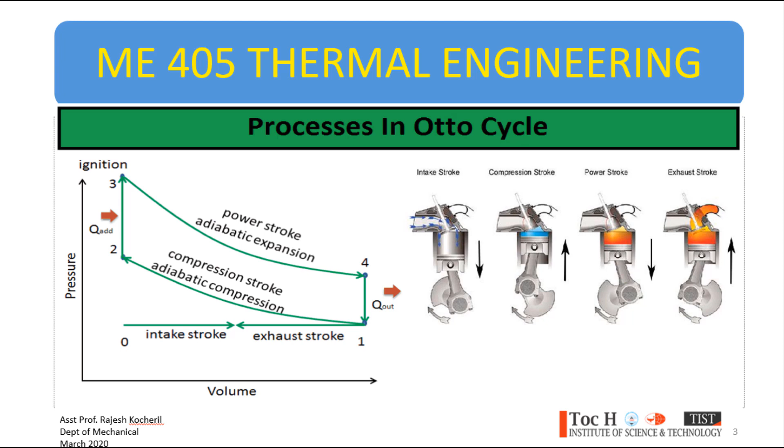From point 4 to point 1, heat rejection takes place, and 1 to 0, or you can say 1 to 6, is the exhaust stroke. This is how the process takes place in an Otto cycle.

Now let us see the PV diagram and TS diagram, pressure volume diagram and temperature entropy diagram of the Otto cycle. At point 1, the cylinder is fully charged with air fuel mixture, and 1 to 2 is the compression.

So the volume is being reduced from point 1 to point 2. The swept volume, Vs, is the volume swept by the piston from one dead center to the other dead center, that is either from TDC to BDC or from BDC to TDC.

In this case, the piston moves from BDC to TDC, causing a reduction in volume, and this volume from 1 to 2 is the swept volume Vs. The volume above the piston when it is at TDC is the clearance volume, which we call V2 or VC.

Then 2 to 3 is the heat addition process, QA, 3 to 4 is the reversible adiabatic or isentropic expansion, and 4 to 1 is heat rejection.

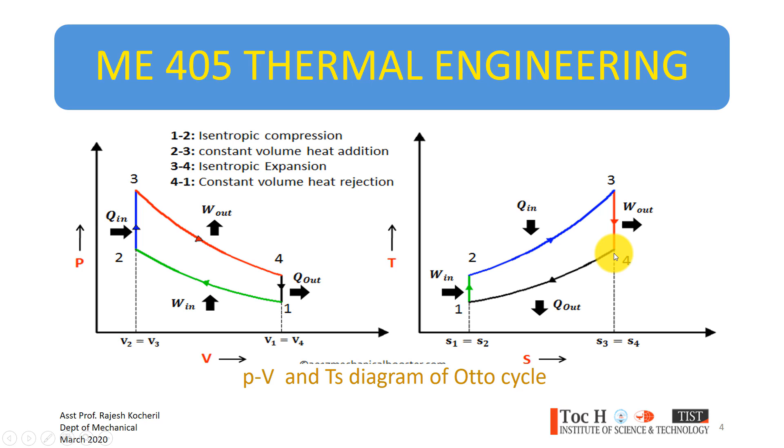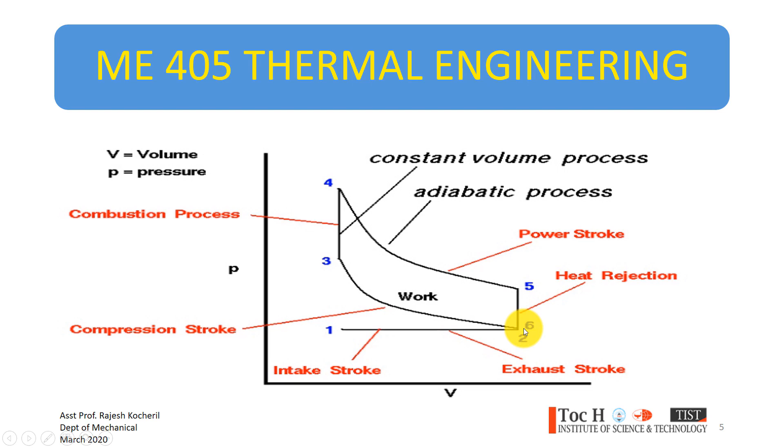For easy understanding, the same process: 1 to 2 is inlet, 2 to 3 is compression stroke, 3 to 4 is combustion, 4 to 5 is expansion or power, and 5 to 6 is heat rejection. In process 1, the inlet valve is open and air from the atmosphere is being taken in.

As the piston moves down this much volume—if this is the bottom dead center and this is the top dead center—the volume swept by the piston from TDC to BDC is the swept volume.

When the piston is at TDC, the volume above the piston is called the clearance volume, VC, or you can call it V2.

After this, as the piston moves up, both inlet and exhaust valves are closed, so the charge is compressed. As the piston exerts work on this fluid, the temperature and pressure increase. When it is about to reach TDC, the spark is initiated and the charge inside ignites in a propagatory way, similar to waves.

Subsequently the power generated by the explosion acts on the piston, and the piston moves down. Through the connecting rod, the piston is connected to the crankshaft, and at the end of the crankshaft, through different power transmission arrangements, it is either transmitted to the wheels, to the diesel alternator, or to the propeller in the case of a ship or motorboat.

Thereafter the exhaust valve opens, and as the piston moves up, the hot gas remaining inside the cylinder is pushed out through the exhaust valve and silencer to the atmosphere, while the inlet valve also opens. This Otto cycle is an idealized thermodynamic cycle which tells you exactly how a spark ignition engine works.

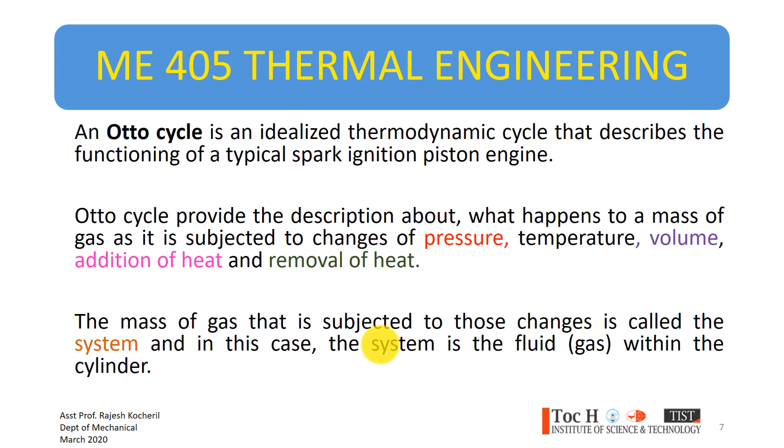The Otto cycle is constructed such that if you measure the volume from 1 to 2 and from 3 to 4, it is the same. So the volume swept from 1 to 2 and from 3 to 4 is the same. The construction of this PV diagram is such that the left and right side of the loop is a pair of parallel constant volume processes, that is, process 2 to 3 and process 4 to 1.

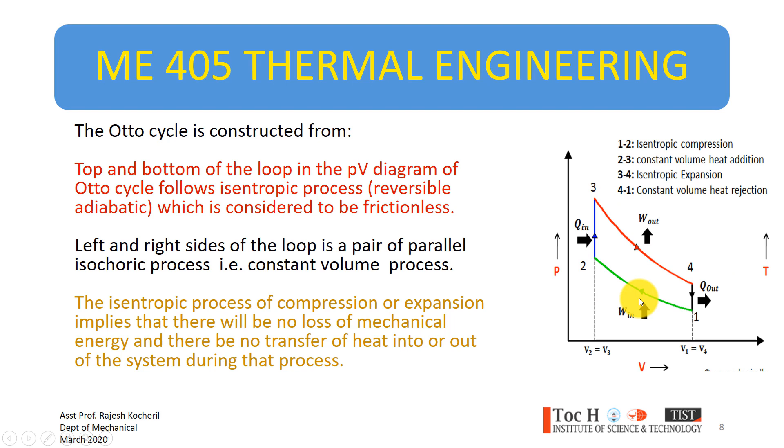Heat addition takes place at constant volume from 2 to 3, whereas 4 to 1 is heat rejection at constant volume. So V1, the volume at 1, and the volume at 4 are the same, so V1 equals V4 and V2 equals V3. These terminologies are required when we do numericals on the Otto cycle.

Process 1 to 2 is isentropic, reversible adiabatic compression. Process 2 to 3 is constant volume heat addition. Process 3 to 4 is reversible adiabatic or isentropic expansion, the power stroke. Process 4 to 1 is heat rejection at constant volume, and 1 to 0 is the exhaust stroke.

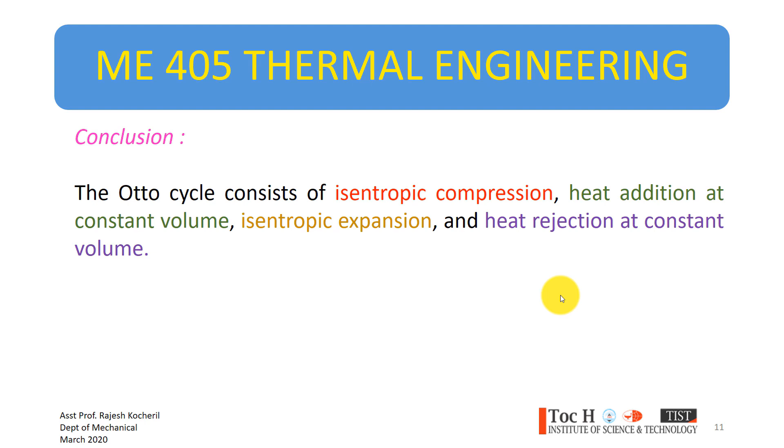To conclude, the Otto cycle consists of isentropic compression, heat addition at constant volume, isentropic expansion, and heat rejection at constant volume.

Now let us derive the efficiency of the Otto cycle. We generally denote efficiency as eta, and efficiency in any process is the work done divided by the heat supplied. In the case of an IC engine, internal combustion engine, the efficiency is the work done divided by the total heat supplied to the system.

Let us consider 1 kilogram of substance. The heat supplied can be at constant volume or constant pressure. If the heat is supplied at constant volume, we call it CV, and if supplied at constant pressure, we call it CP. Here the heat addition and heat rejection take place at constant volume. Therefore, the heat supplied is CV into T3 minus T2.

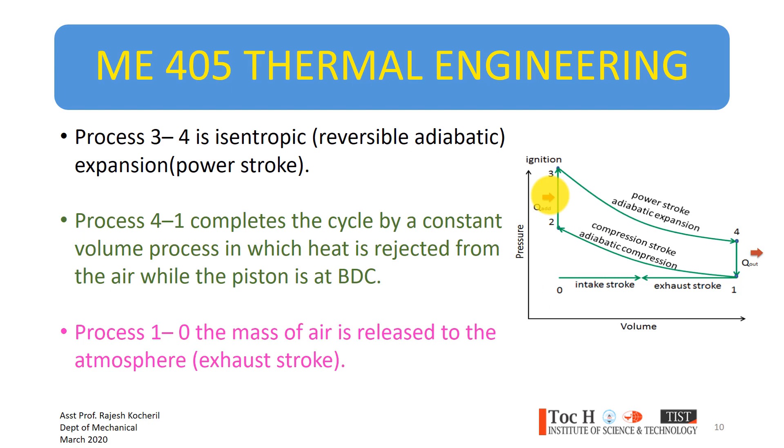T3 is where the heat addition is cut off and T2 is the point where heat addition commences. Therefore, the heat supplied to the system at constant volume is CV into T3 minus T2. Heat rejection occurs in the process from 4 to 1.

The heat rejection at constant volume is CV into T4 minus T1. Now, work done is heat supplied minus heat rejected. In an IC engine, heat supplied is CV into T3 minus T2 and heat rejected is CV into T4 minus T1. Therefore, work done in an Otto cycle is CV into T3 minus T2 minus CV into T4 minus T1.

The efficiency of the cycle is work done by heat supplied, and work done is heat supplied minus heat rejected. Therefore, efficiency eta is heat supplied minus heat rejected by heat supplied. Heat supplied is CV into T3 minus T2 and heat rejected is CV into T4 minus T1. This gives the efficiency of the cycle if you know the temperature at all salient points.

The salient points are T1, T2, T3 and T4, and the value of CV is known and fixed. The value of CV is 0.718 and the value of CP is 1.01, and CP by CV is gamma, which is 1.01 divided by 0.718, giving you 1.4.

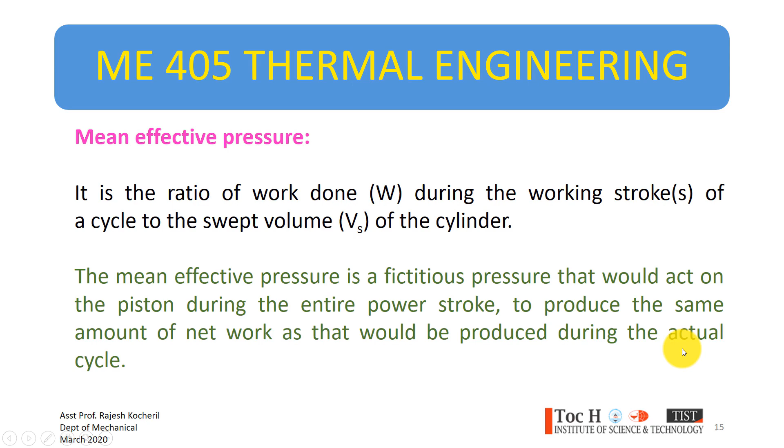Now in concluding this session, I wish to tell you that the efficiency totally depends upon the compression ratio. As you are aware, the efficiency will increase if there is an increase in the compression ratio. So the efficiency of Otto cycle totally depends upon compression ratio. The only factor, or the prime factor, that affects the efficiency of Otto cycle is its compression ratio.

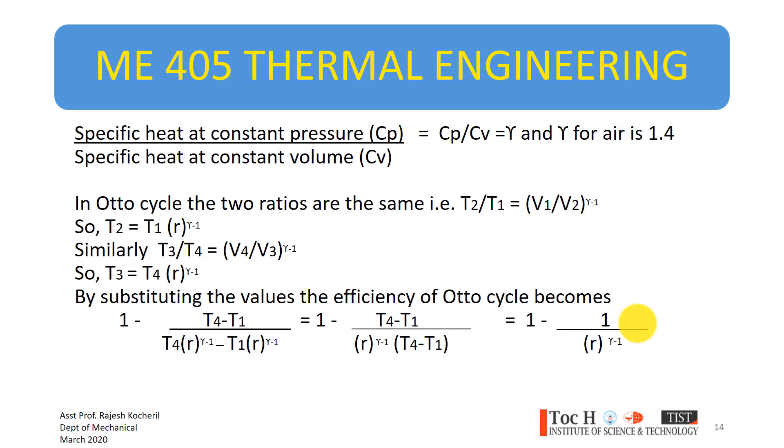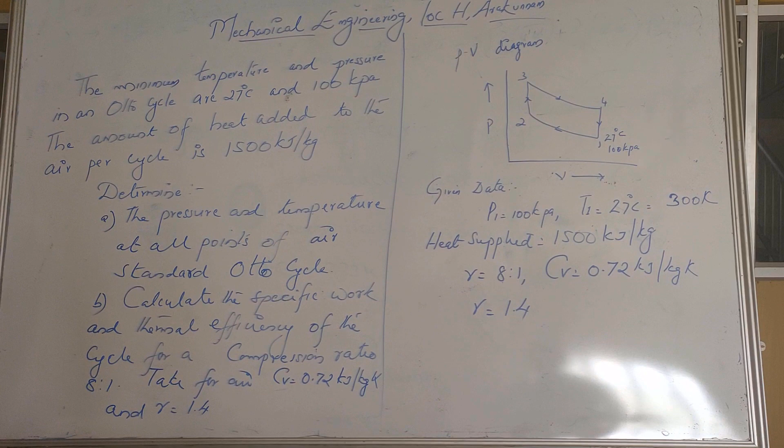Now we are going to do a numerical on Otto cycle. As you are aware, Otto cycle is a constant volume process, so heat addition and heat rejection takes place at constant volume. Keep in mind that heat addition and heat rejection takes place at constant volume, and the volume at point 2 to 3 and 4 to 1 are same. So V1 will be equal to V4, V2 will be equal to V3.

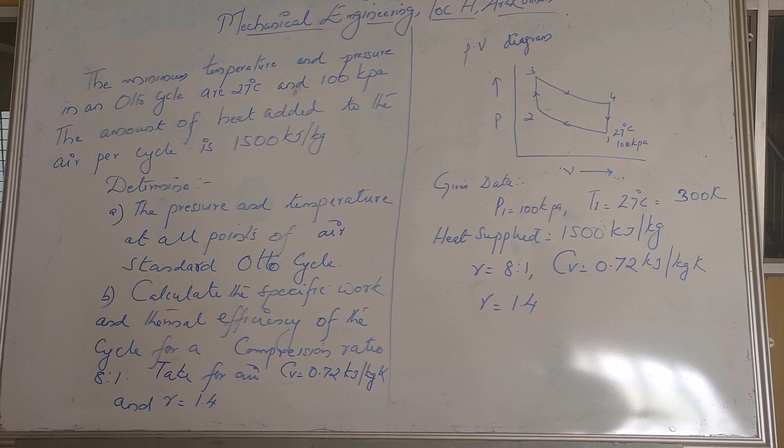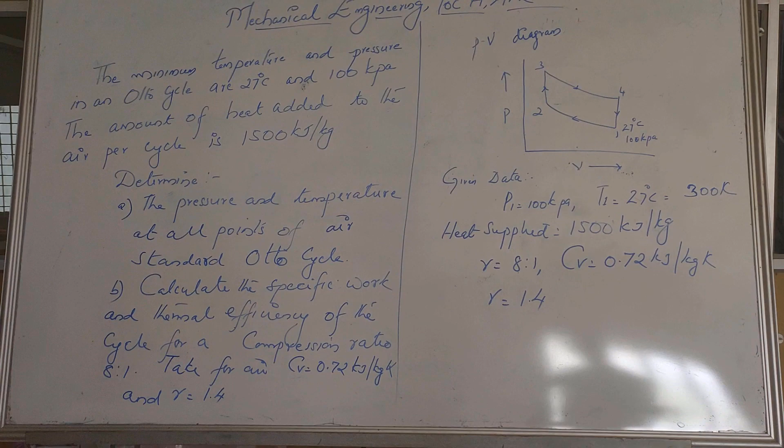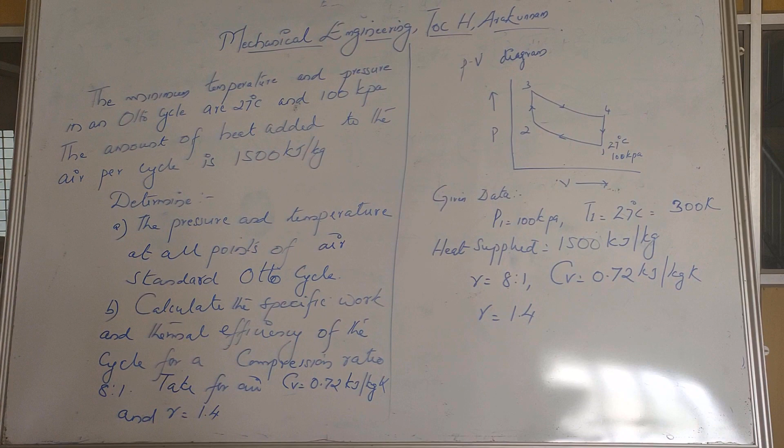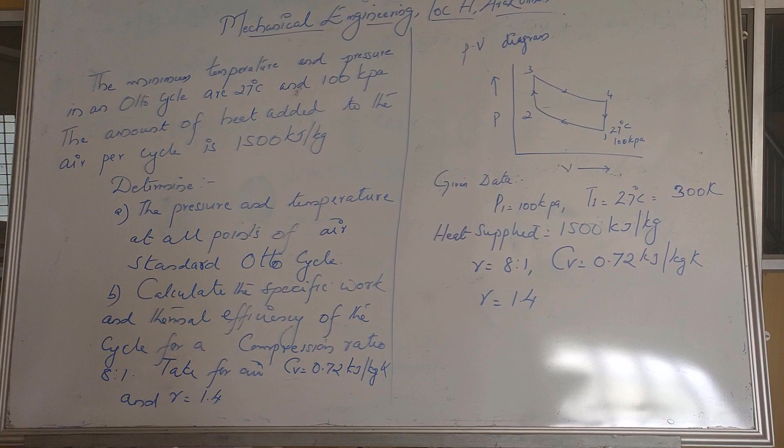Now keeping this in mind, we are going to do a numerical. The question is: the minimum temperature and pressure in an Otto cycle are 27 degrees Celsius and 100 kilopascal. The amount of heat added to the air per cycle is 1500 kilojoules per kilogram. Determine the pressure and temperature at all points of the air standard Otto cycle. B: Calculate the specific work and thermal efficiency of the cycle for a compression ratio of 8:1.

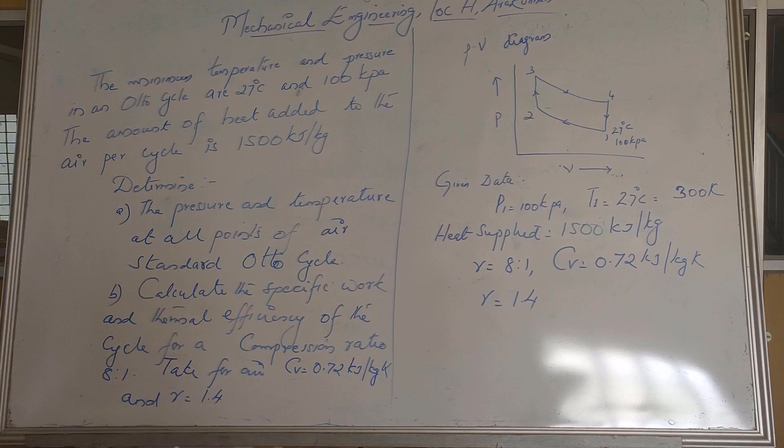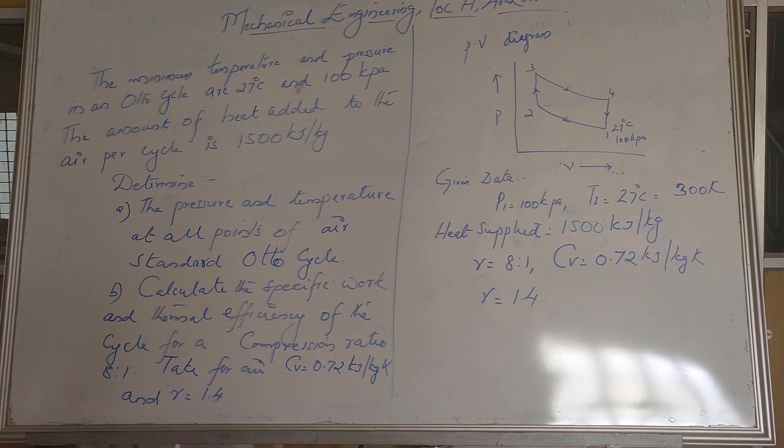Now before you get into solving this numerical, you should keep in mind how a PV diagram of Otto cycle looks like. So you should draw the PV diagram of Otto cycle before you actually proceed, and mark whatever values are given in the PV diagram itself, so that at the end you are aware that all questions are answered appropriately.

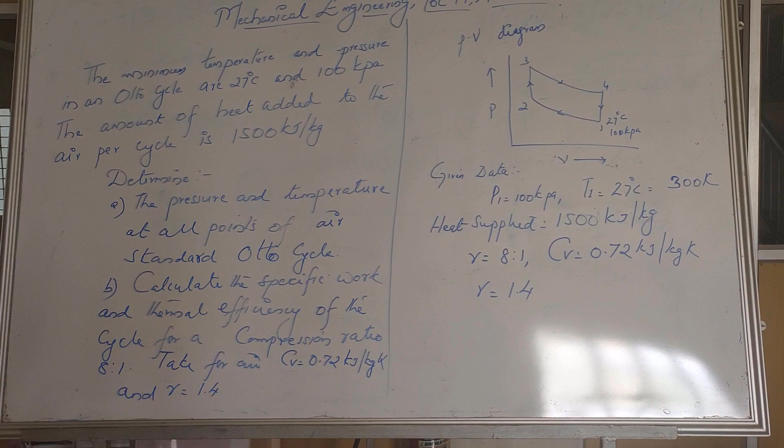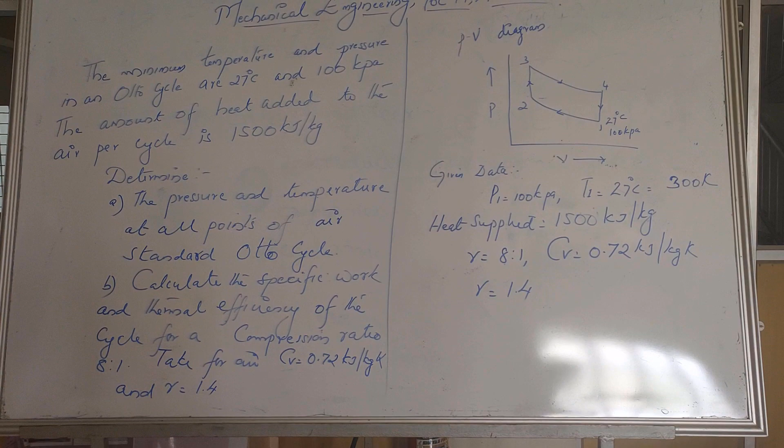Now the PV diagram I have drawn on the board has salient points 1, 2, 3 and 4. That means you need to find out the temperature at points 1, 2, 3, 4 and pressure at points 1, 2, 3 and 4.

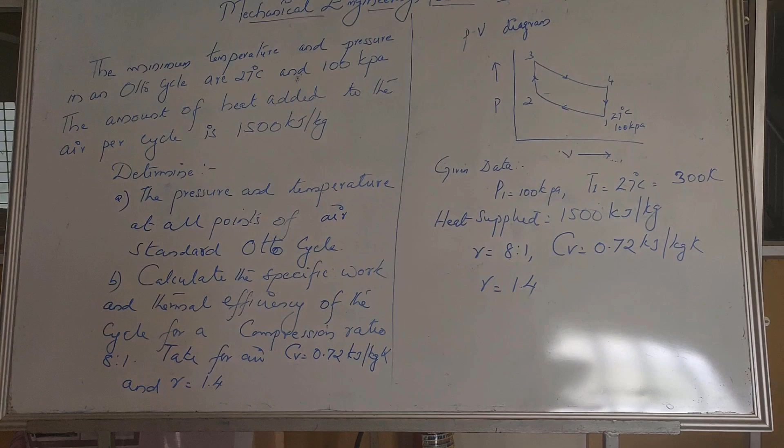Now in the question, the given data is: at point 1 the pressure is given as 100 kilopascal, so you can mark that in the PV diagram. And the temperature is also given as 27 degrees Celsius — keep in mind you will have to convert this into Kelvin, so 27 plus 273 is 300 Kelvin. Mark that in the PV diagram itself. Then the rest of the values you have in the question is heat supplied, which is 1500 kilojoules per kilogram.

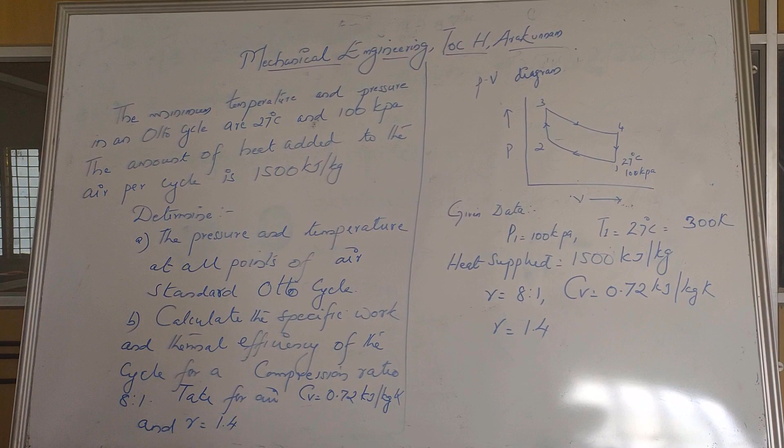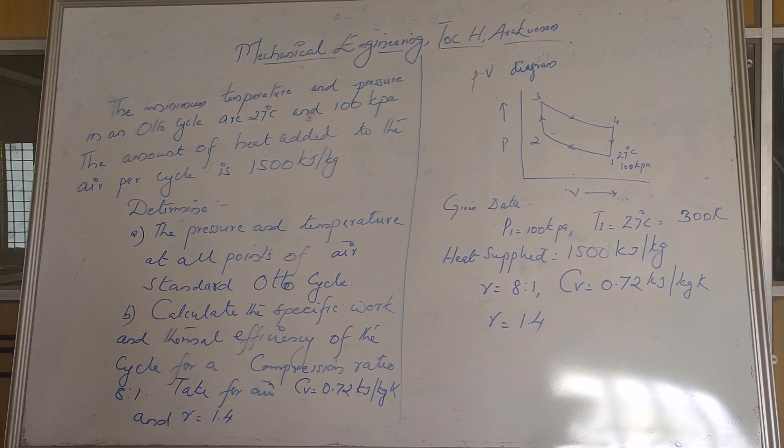That means heat supplied is Cv into T3 minus T2. So you can say that Cv into T3 minus T2 is 1500 kilojoules per kilogram. The compression ratio is 8:1, and compression ratio, as you are aware, is V1 by V2, or you can say it is total volume by the clearance volume, or Vs plus Vc by Vc. That value is given as 8:1.

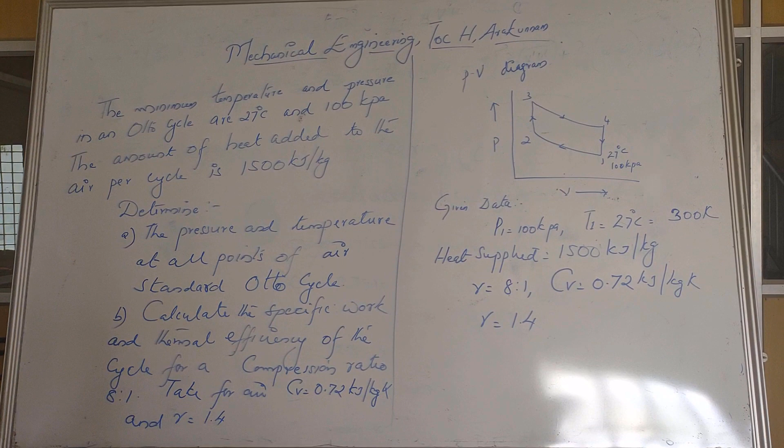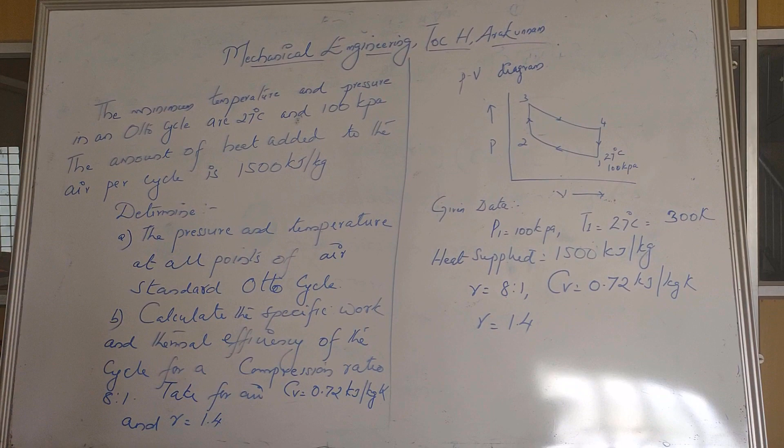Then the Cv is given, since this is a constant volume process, as 0.72 kilojoules per kilogram Kelvin, and gamma, that is Cp by Cv, is 1.4. Now keep in mind that it is not mandatory that the value of Cv and gamma is given in all the questions. You should know by heart the value of Cv, Cp, and gamma, that Cp by Cv is gamma, that is 1.4.

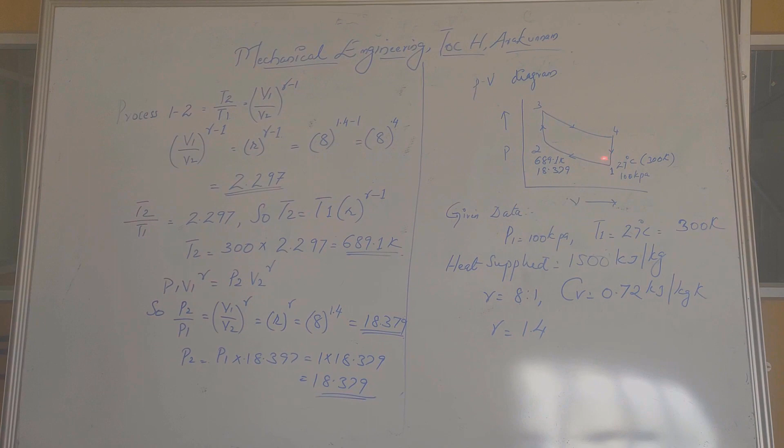Now let us take each process. At point 1, the temperature and pressure are already given. Now let us take process 1 to 2. In the derivation itself, we know how to find out the temperature at this particular point T2, and if you know T1, you can easily find the values at T2.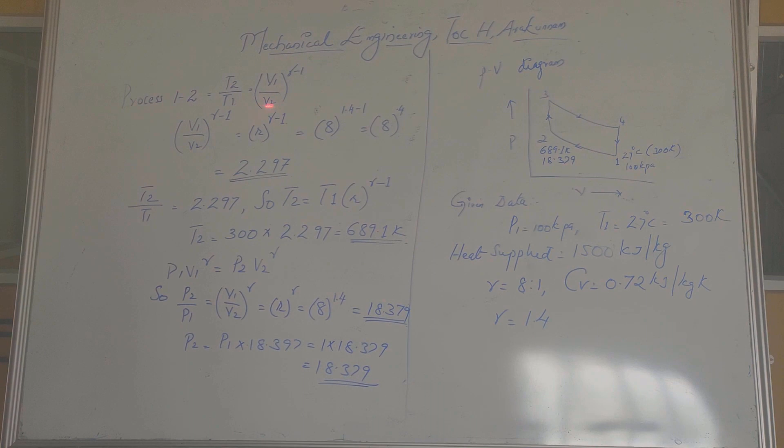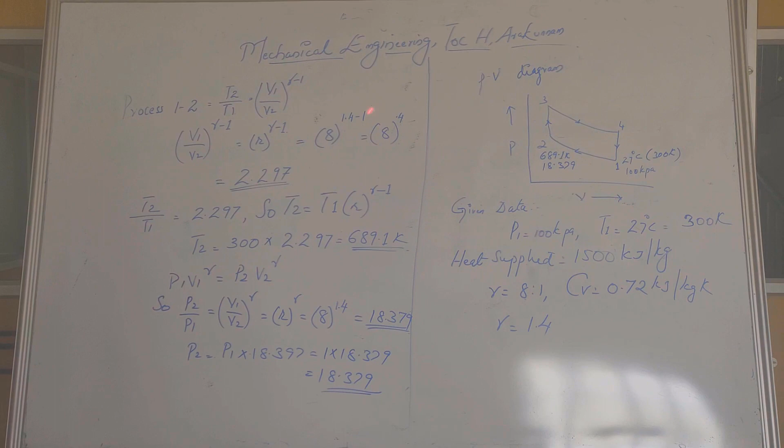For process 1 to 2, T2 by T1 is equal to V1 by V2 raised to gamma minus 1, and V1 by V2 is compression ratio R, which is already given in the question. Since T1 is known, and gamma is known, you can find T2. Substituting the values, V1 by V2 raised to gamma minus 1 is R raised to gamma minus 1. R is 8 in the question, so 8 raised to 1.4 minus 1, that is 8 raised to 0.4. The value is 2.297.

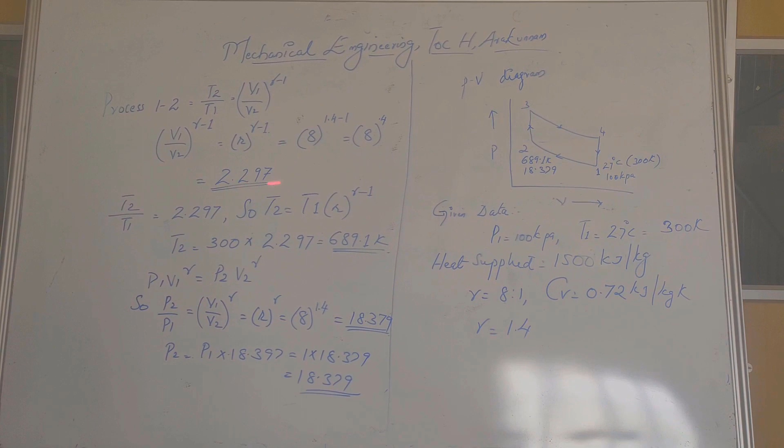So 2.297 is the value of T2 by T1. Since T1 is known, T2 is equal to T1 into 2.297, which gives T2 as T1 into R raised to gamma minus 1, where R raised to gamma minus 1 is 2.297. So you get the value of T2 as 689.1 Kelvin, which you mark on the PV diagram.

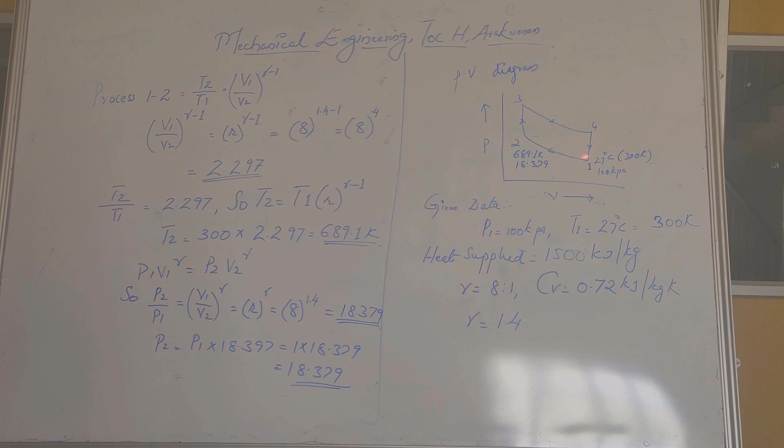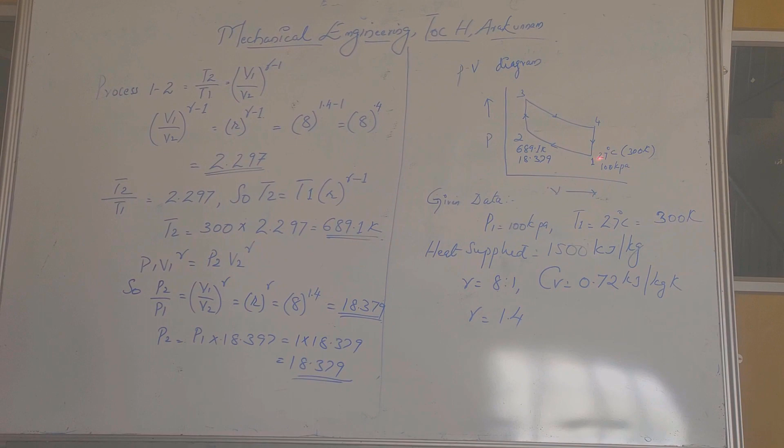So T1 is marked, P1 is marked, now T2 is marked. Now we need to find out P2. In the Otto cycle, in this process, P1 V1 raised to gamma, pressure and volume at point 1, is equal to P2 V2 raised to gamma.

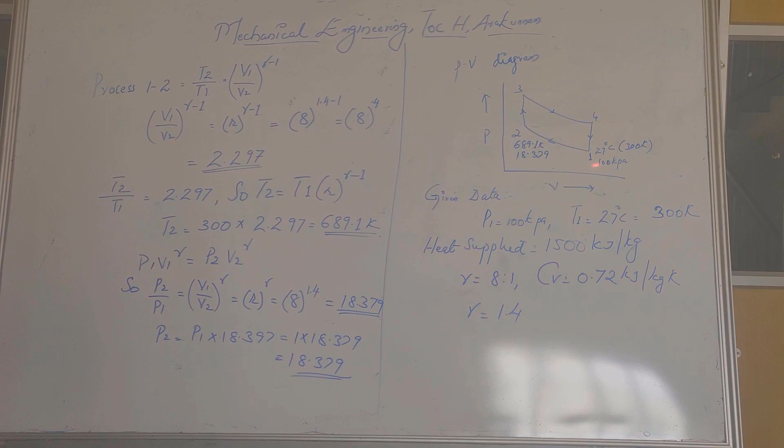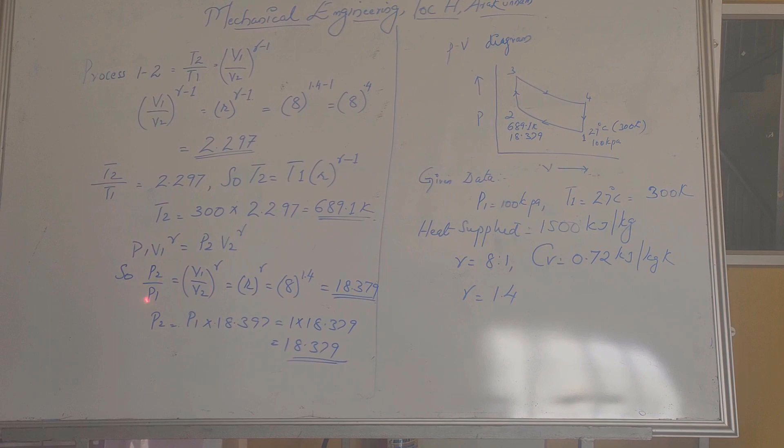So P1 V1 raised to gamma is equal to P2 V2 raised to gamma. If you have P1 and V1, you can easily find P2. So P2 by P1 is equal to V1 by V2 raised to gamma, and V1 by V2 is compression ratio R. Therefore, P2 by P1 is equal to R raised to gamma, that is 8 raised to 1.4, which is 18.37.

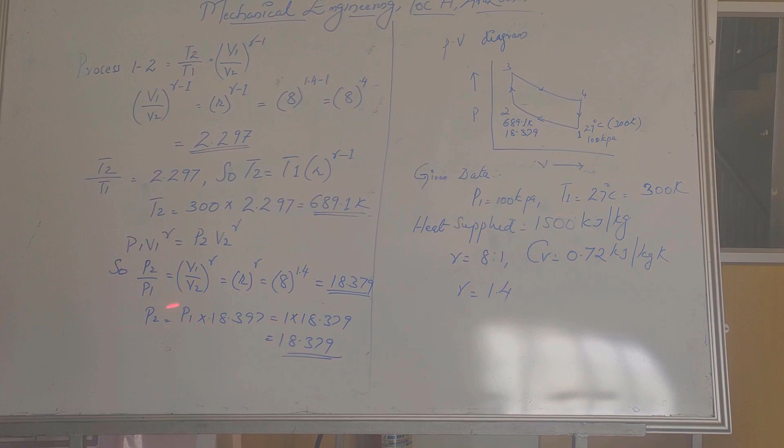So P2 by P1 is equal to 18.379. Now P2 is P1 into 18.379, and in the question P1 is given as 100 kilopascal. So that is 1 into 18.379, and you get the same value, 18.379. Therefore, at P2 the pressure is 18.379.

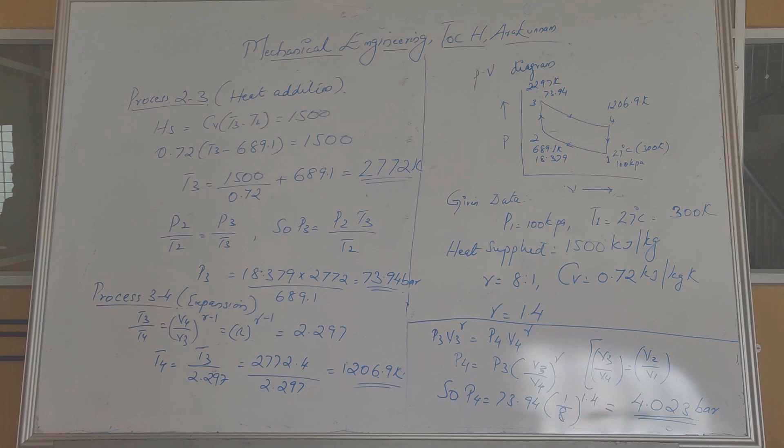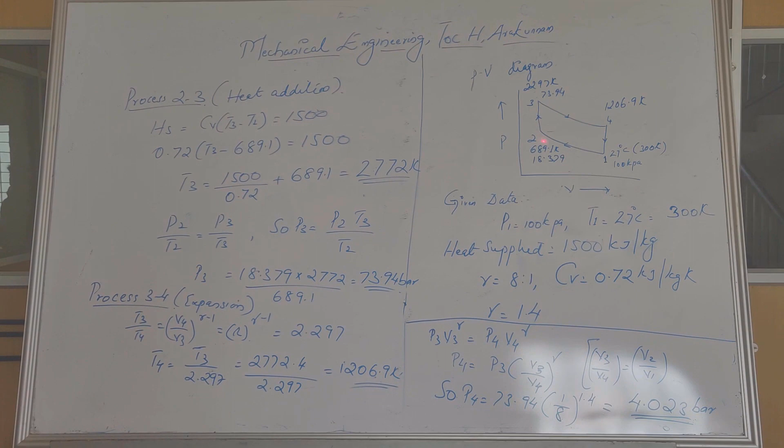Now we have already found out what is the temperature and pressure at point 2. Let us see process 2 to 3. This process is heat addition at constant volume, so the volume here is constant and the pressure is increasing. At point 2, the temperature is 689.1 and the pressure is 18.379 bar.

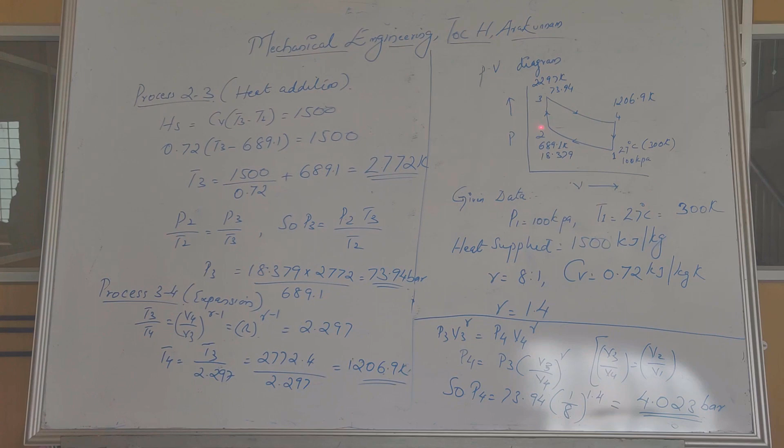As given in the question, the heat supplied from point 2 to point 3 is 1500 kilojoules per kilogram. From the derivation, we know that heat addition is Cv into T3 minus T2, since the process is constant volume. So Cv into T3 minus T2 is 1500. The value of Cv is known, and T2 is known, so now we can find T3.

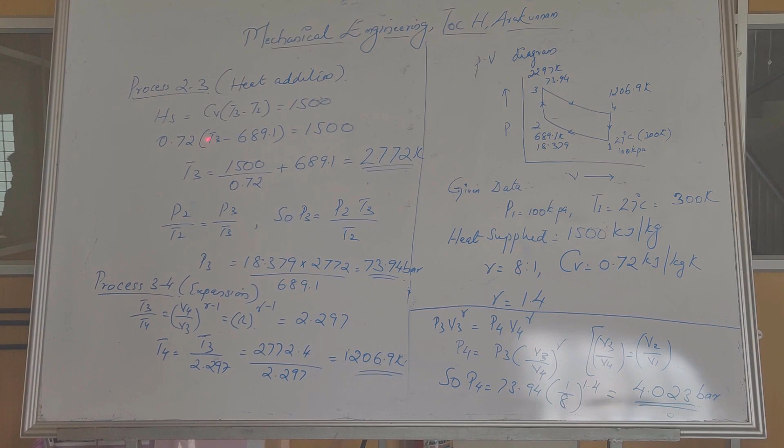So 0.72 into T3 minus 689.1 is 1500. Substituting the values, T3 will be 1500 divided by 0.72 plus 689.1, giving a value of 2772 Kelvin. So the temperature at point 3 is 2772 Kelvin. From 689.1, when we supplied heat, the temperature increased to this value.

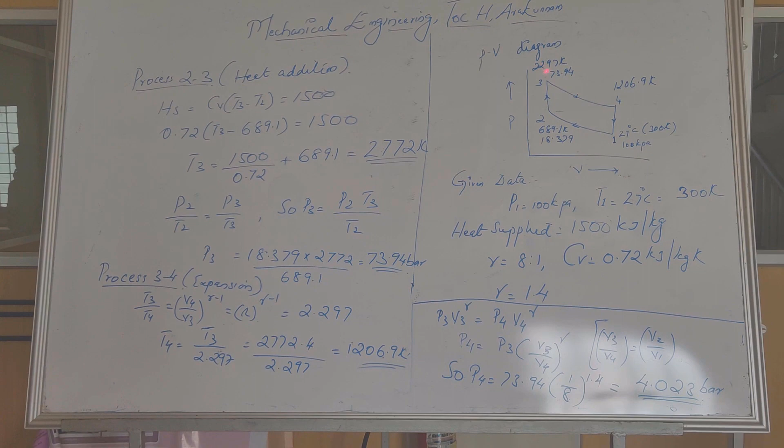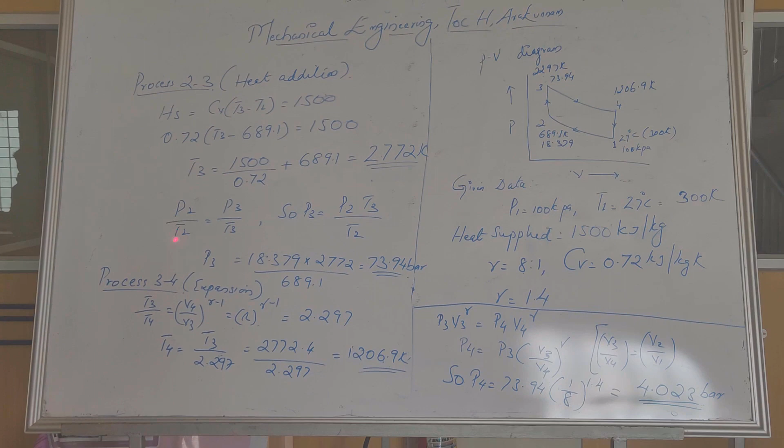You are aware that when the temperature increases, since the volume is constant, the pressure will also increase. Now let us find the pressure at point 3. P2 by T2 will be equal to P3 by T3, because the temperature and pressure increase correspondingly.

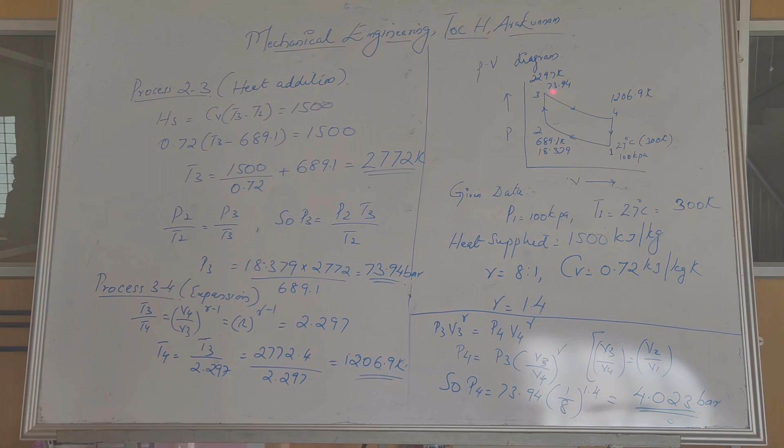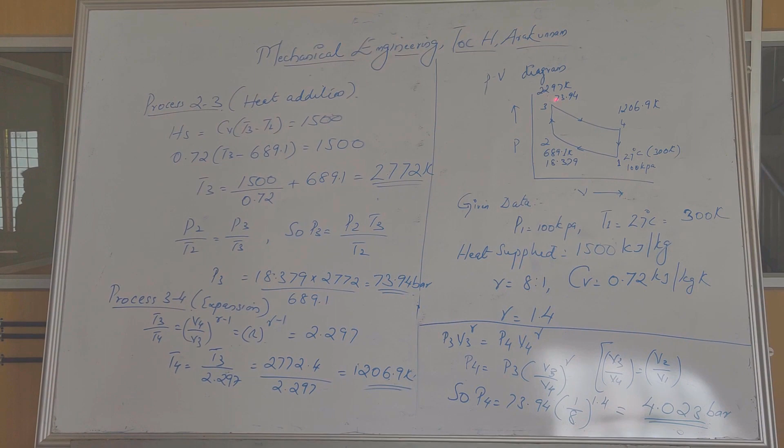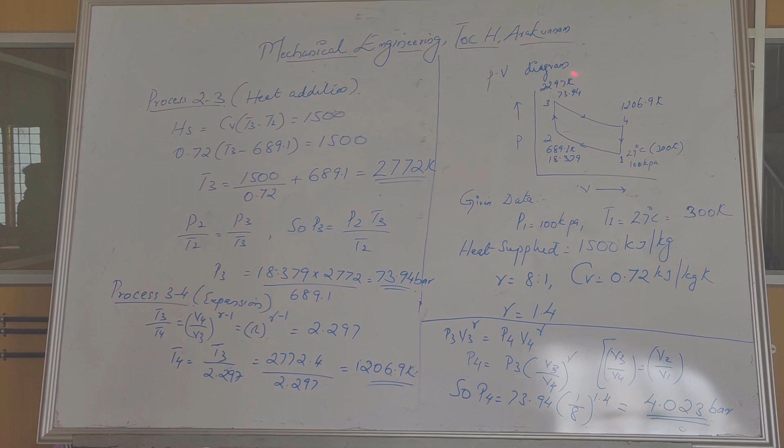So now when you substitute the values, you get the temperature at point 3, T3, as 1500 divided by 0.72 plus 689.1, which gives the value of 2772 Kelvin. So the temperature at point 3 is now known. You can see that from 689.1, when heat is added, the temperature has increased to this value.

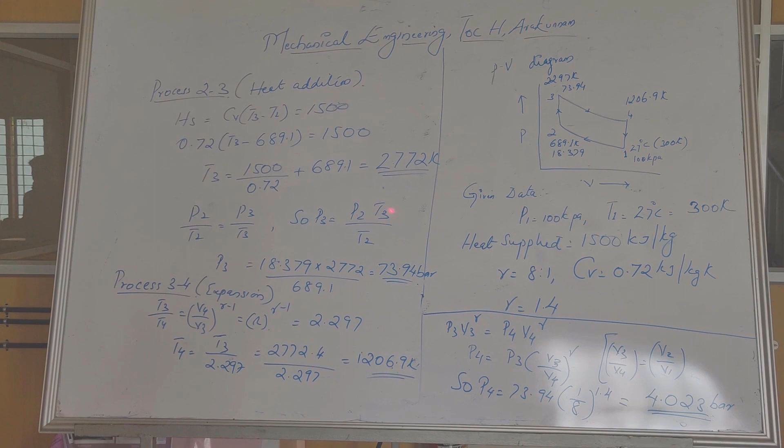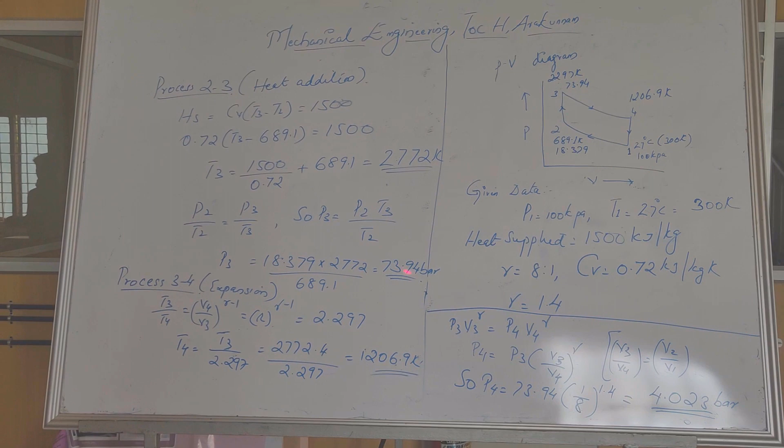Now, as you are aware that the temperature has increased and the volume is constant, the pressure should also increase. Let us find out the pressure at point 3. P2 by T2 will be equal to P3 by T3, as the temperature and pressure increase correspondingly. Now when you cross multiply, P3 will be equal to P2 into T3 by T2. P2, T3 and T2 are known to you, so when you substitute the values, you directly get P3. That gives you 73.94 bar. So the pressure from 18.379 has increased to 73.94.

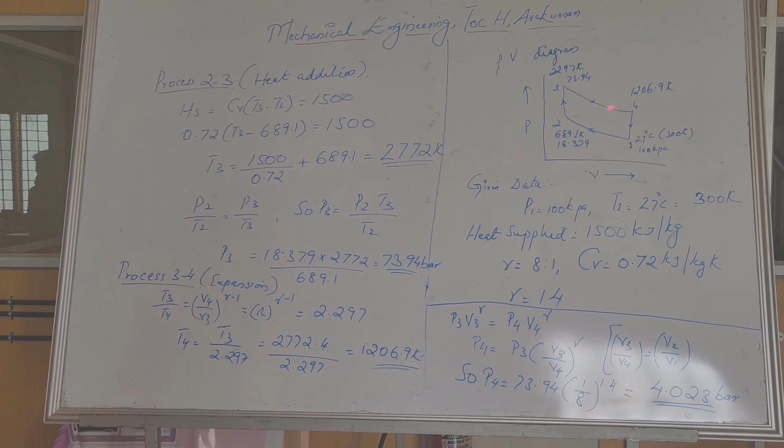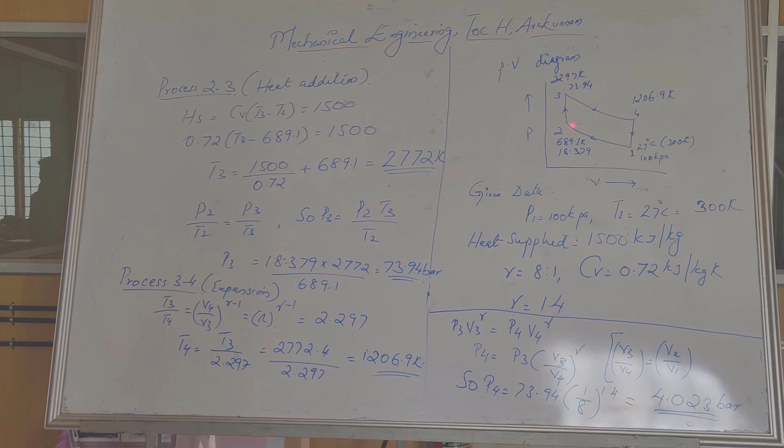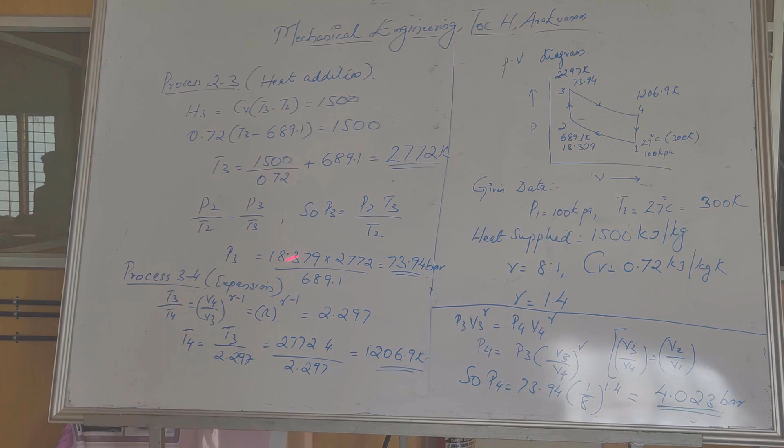Now the point left with us is point 4, what will be the temperature and pressure. Process 3 to 4 is expansion, so the volume will increase and subsequently the pressure and temperature should reduce. When you mark these points and find the values, you should have a basic idea that at point 1 the temperature will be higher at point 2, and the maximum will be at point 3. And at point 4 it will be the second highest value because heat is being rejected at this particular point. Now let us take process 3 to 4, the expansion process.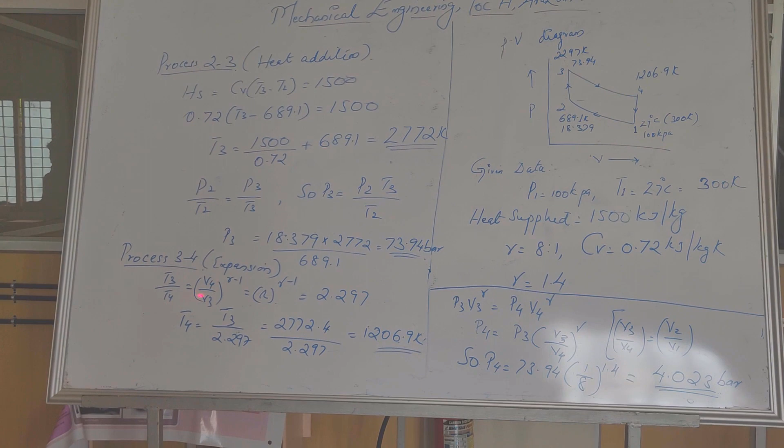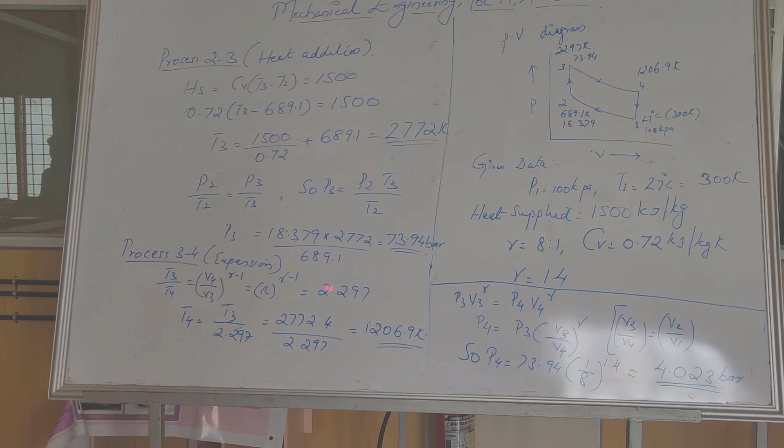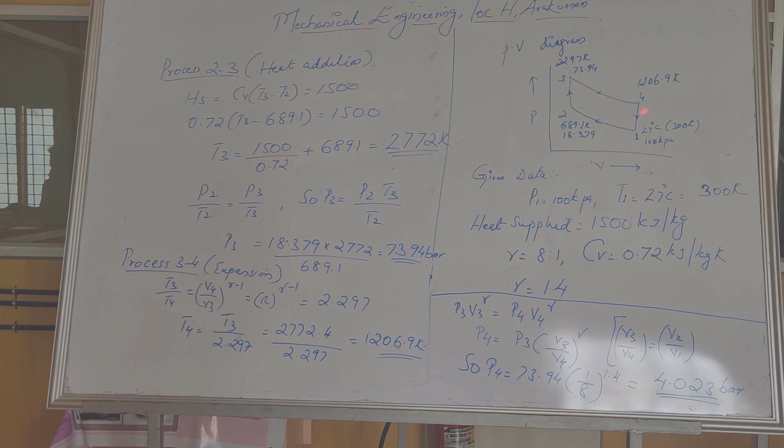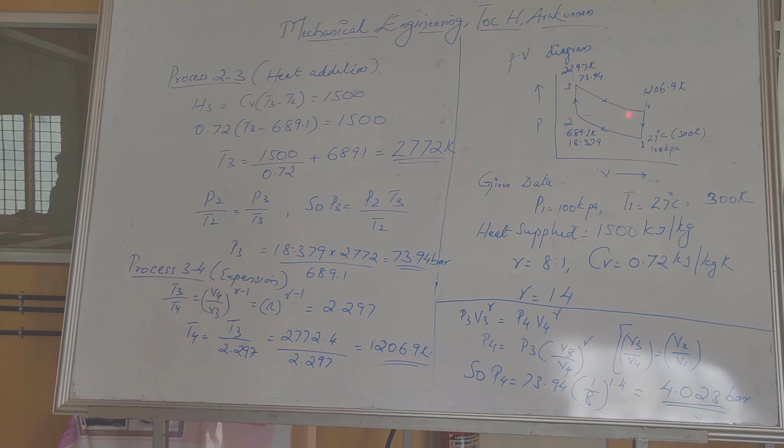You know that T3 by T4, as T2 by T1 is V2 by V1, same way T3 by T4 will be equal to V4 by V3 raised to gamma minus 1. And V4 by V3 is equal to V2 by V1. So V1 by V2 is R, therefore V4 by V3 will be R. So you can write T3 by T4 is equal to V4 by V3 raised to gamma minus 1, that is R raised to gamma minus 1, and the value of R is already known to you, we found this term earlier. Put that value as 2.297. Now T4 will be T3 divided by 2.297, and value of T3 is 2772.4 and value of R is 2.297. You get the value as 1206.9 Kelvin. So the temperature at point 4 after expansion will be 1206.9 Kelvin. From 2297 Kelvin, when expansion takes place, the temperature has reduced to 1206.9 Kelvin.

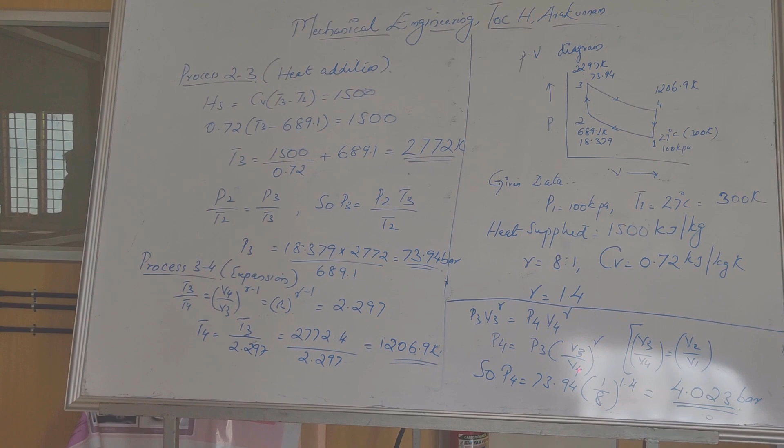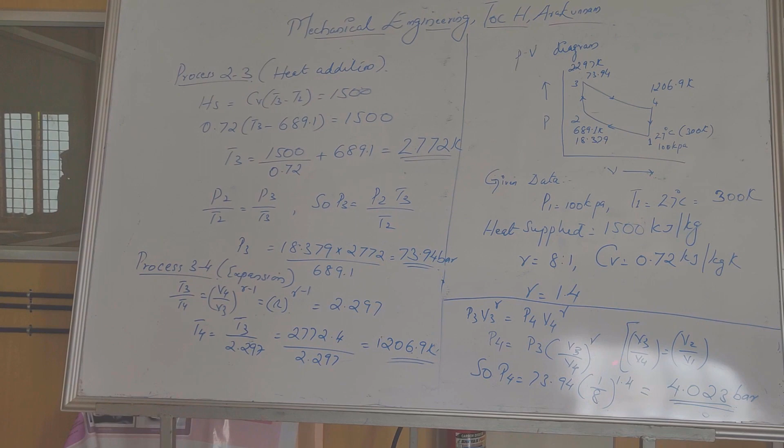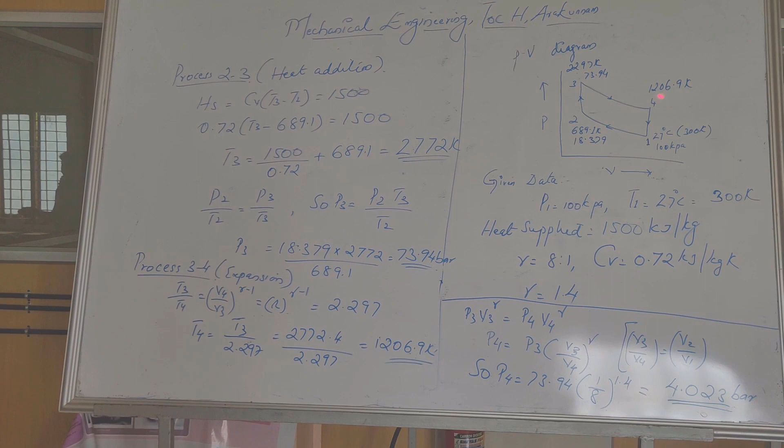You should know that the pressure at this point will also be lesser than the pressure at point 3. Now let us find out what is the pressure at point 4. As we are aware, P1 V1 raised to gamma is P2 V2 raised to gamma, so P3 V3 raised to gamma is P4 V4 raised to gamma. Now when we substitute this, P4 is equal to P3 into V3 by V4 raised to gamma. And V3 by V4, you are aware, is V2 by V1, which is the same as 1 by R. Now put the value, P4 will be equal to P3 which is 73.94, into 1 by 8, 8 being the compression ratio, raised to gamma 1.4, you get 4.023 bar. So at point 4, the pressure is 4.023. Now all temperature and pressure at the salient points have already been calculated and noted.

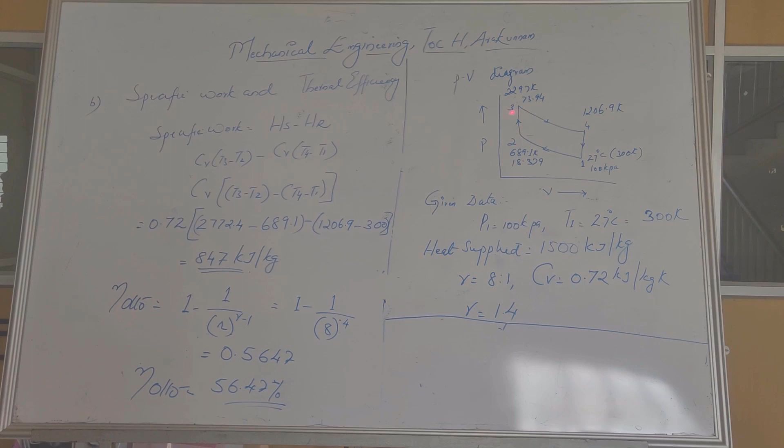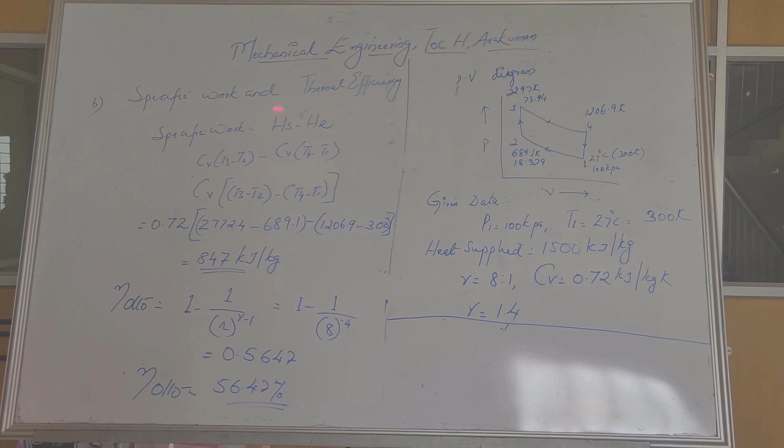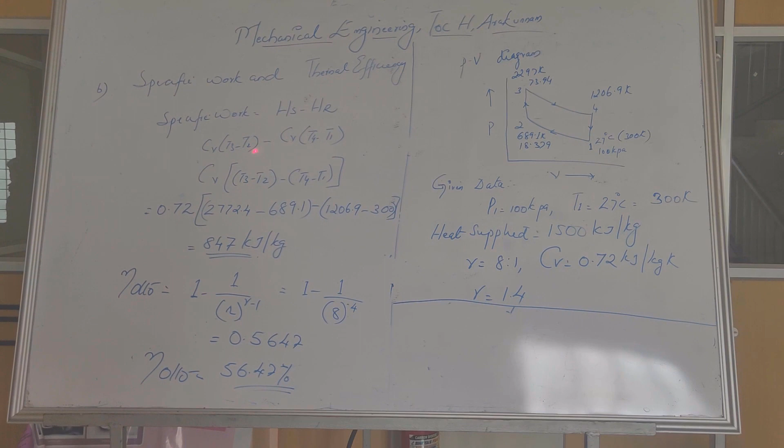Now we have already found out the temperature and pressure at all salient points. The next part we need to find out is the specific work and thermal efficiency. As you are aware, specific work W is equal to heat supplied minus heat rejected. Heat supplied is CV into T3 minus T2, and heat rejected is CV into T4 minus T1. Now you have the values of T3, T1, T2, T4 and CV. When you substitute the values, you get the specific work as 847 kilojoules per kilogram.

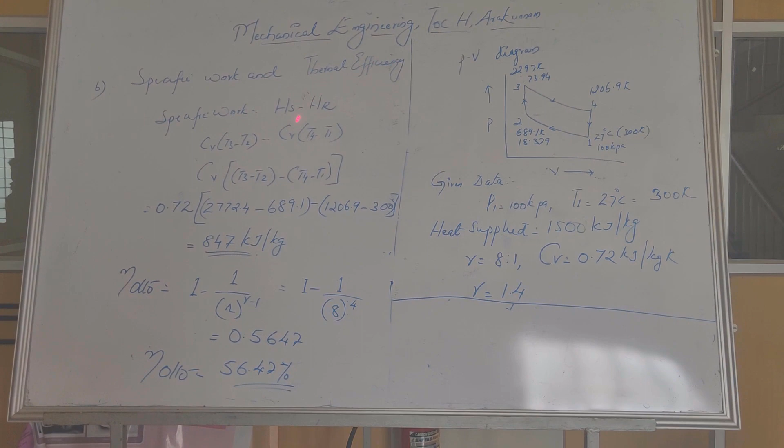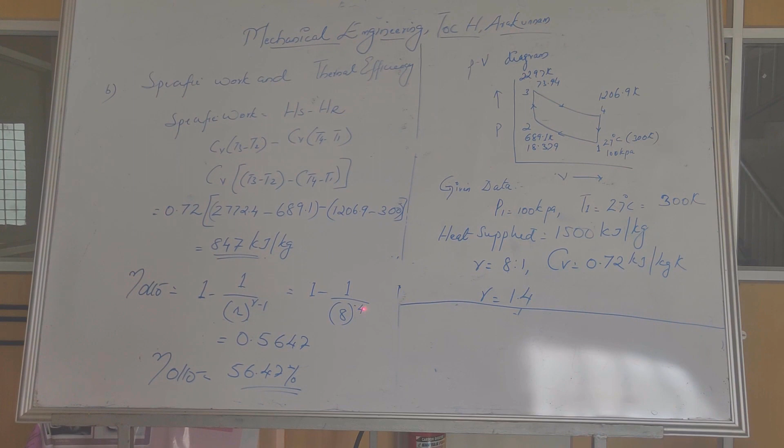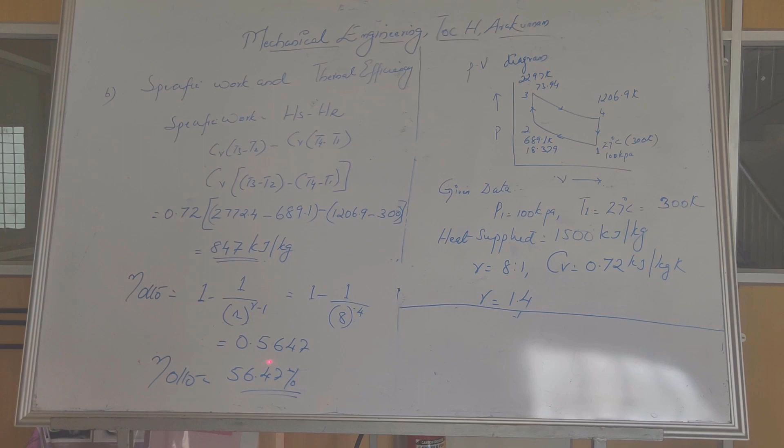Now the last part of this numerical is to find out the thermal efficiency of the cycle. As we already discussed in the derivation, the thermal efficiency depends mainly on the compression ratio R. The equation for finding the efficiency of the Otto cycle is 1 minus 1 by R raised to gamma minus 1. The only values you need are the compression ratio R and gamma, rest all is 1. So 1 minus 1 by 8 raised to 1.4 minus 1, that becomes 0.4. So 1 minus 1 by 8 raised to 0.4 is 0.5647. Now put this in percentage, multiply by 100, and the efficiency of the Otto cycle becomes 56.47.